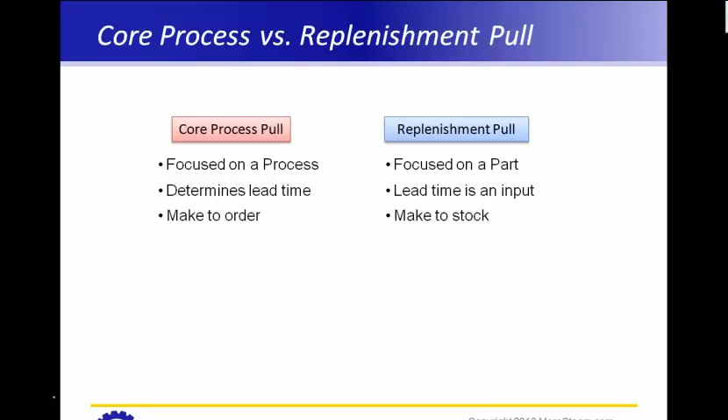So that's another difference. Like I said on the first slide there, core process pull is a make-to-order environment where we're not going to signal the process to begin working until we get an actual customer demand, versus a replenishment pull where we, based on historical information, size our replenishment pull buffers and then make that to stock. We still don't trigger the replenishment of that buffer until we get customer demand, but we do pre-populate that replenishment pull buffer with some stock in anticipation of customer demand.

Another difference, core process pull is truly applicable absolutely everywhere. Whether it be a shop floor manufacturing environment or a transactional or service environment, core process pull and containing and capturing the amount of work in process that we're going to allow into a process is really applicable absolutely everywhere. Replenishment pull on a large scale is typically more of a manufacturing type of environment.

There are certainly applications for replenishment pull in, of course, warehousing and stocking, and even in the service environments, supplies and whatnot can be managed on a replenishment pull or an easier to implement variation of it, a two-bin replenishment pull. But the large scale implementations are more in a manufacturing environment.

Now, as far as how we can actually implement these two different pull systems in terms of the actual control mechanisms, that's actually the same between the two. We can have physical kanban cards, we can have electronic signals, we can have bins, we can have any type of storage boxes or whatever moving in either one of these types of pull systems. So they're very common in that sense. So let's deep dive a little bit into the design of a core process pull system.

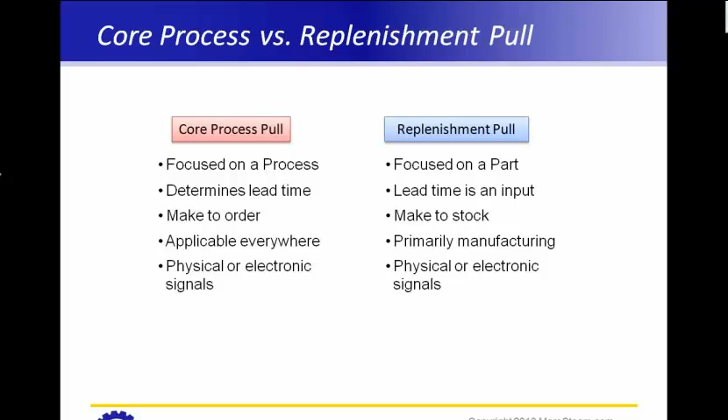Bringing Little's Law back to the picture, and hopefully we're all quite familiar with Little's Law. Total lead time through a process is equal to the work in process divided by the throughput, or the exit rate of that process. And so that's a pretty basic relationship that we should hopefully all be fairly familiar with.

Now, total lead time, in this sense, encompasses all aspects of that process, both value-added time and waste time. So we have the true on-tool or value-added time that's being performed on the work that's moving through that process. But we also have all the queuing time, the transportation time, rework time, all of that comes together in total lead time.

Now, the question can become, is total lead time something that is explicitly set by your company or organization? Is it something that the customer sets for you and they have a particular demand that must be met? Or, like many organizations, is it something that just sort of happens? And over time, we develop into habits of lead time through a process is, say, 3 weeks, and it kind of is what it is, and sometimes it's 2 weeks, and sometimes it's 5 weeks, but it's not something that's explicitly controlled, but rather something that just is experienced by the organization.

So in a lean transformation and in the Lean Six Sigma world, we want to certainly make that something that's not just observed and experienced, but something that's designed so that we have a specific lead time that we are going to target and hit, and we have the tools to make that happen.

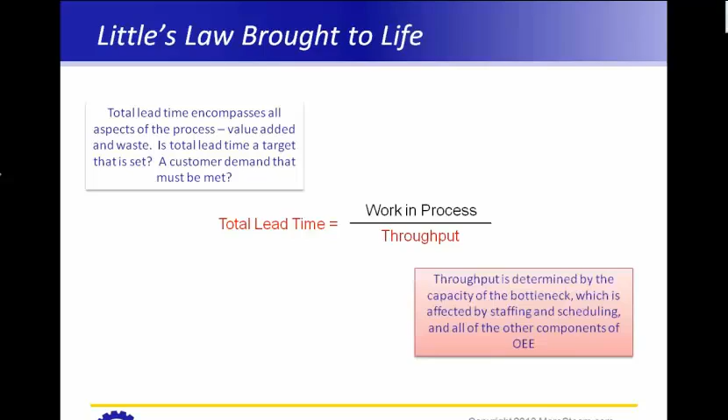If we look at throughput, throughput is determined by the capacity of our bottleneck step in the process, and all of the components of overall equipment effectiveness go into what might be our throughput.

If we look at the work in process, WIP is rarely managed directly. Over and over again, going into different client facilities, I'll hear the phrase that we can't finish something if we don't start it. And so WIP is pushed into a system and started without any regard as to what impact that is going to have on all the other parts or items that are already in process and what impact that has on the lead time of the process.

So in a core process pull system, we are going to be explicitly managing that work in process and sizing that work in process in relationship to our capacity and our demand so that we can hit a specific target total lead time. So in the end, we are going to be controlling WIP, and we can control WIP in several different ways with different mechanisms, but in the end we have to control that WIP and make sure that we then get a stable lead time through the process.

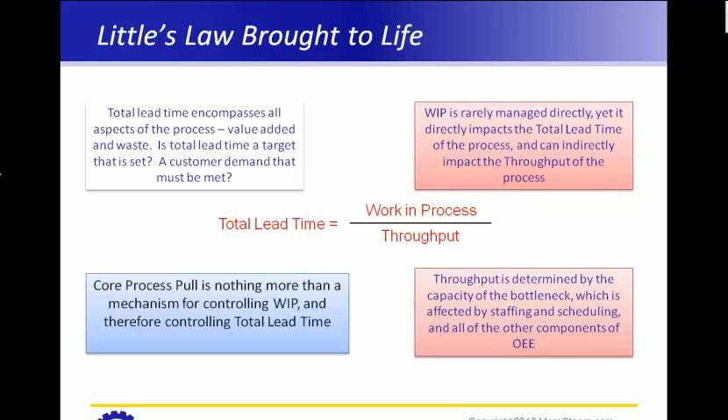If we were to calculate total lead time for a process and take the WIP all the way down to, say, one piece, even if one piece was really not enough work in process and we were starving our bottleneck, we still wouldn't have nearly zero lead time. We would run into a minimum, and that minimum is the value-added time that it takes to actually produce that item or produce that service.

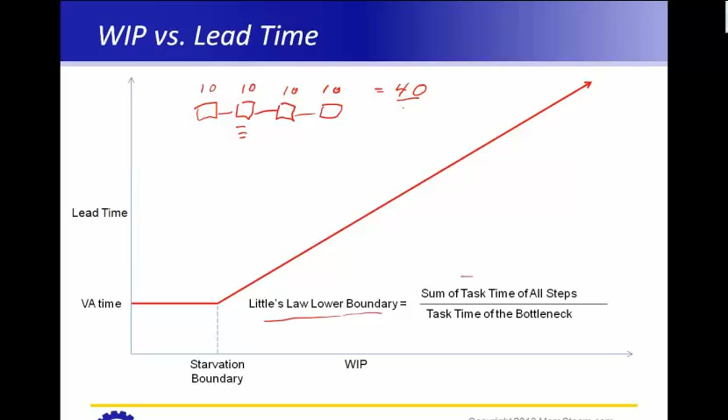And our bottleneck is any one of those, since it's a perfectly balanced process, so divided by 10, 4 pieces of WIP. 40 divided by 10. And that makes perfect sense. 4 steps, each one equally balanced. Therefore, we need 4 pieces of WIP so that everybody's working on something at once.

Let's take a look at another scenario. Say we have a situation where we have 1 minute in the first step and 1 minute in the second step and 37 minutes worth of work in the third step, and then 1 minute worth of work in the last step here. I think we were talking minutes above.

So we still have the same sum of 40 across all of those, but now our bottleneck is actually 37, which if we do that division comes out to 1 point plus a little bit, 1.03 or 06 or so. So in this case, we're actually saying that we really don't need 4 pieces of WIP. We need just a little bit over 1 piece of WIP in the process. Well, that makes a lot of sense actually when you look at what's going on in here.

If we had our 1 piece of WIP here at our bottleneck and they were just beginning work, we'd have the first minute of work, the second minute of work, the third minute of work, on up until we got to the 35th minute of work. And only at that 35th minute of work, when we're going to the 36th minute of work in our third station, that's when we need this minute of work here on our first station.

Then we go to the 37th minute of work, and then this piece can move from here to the second station and do its 1 minute there. And then the third station finishes its work. That goes to the fourth station, and then this piece begins its work there. So in a very unbalanced process, we actually need less WIP.

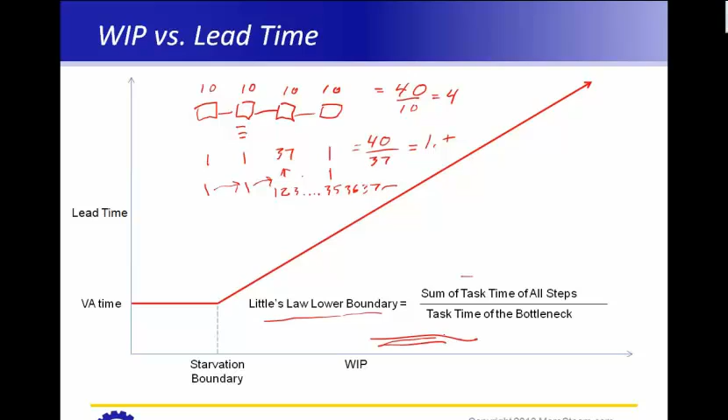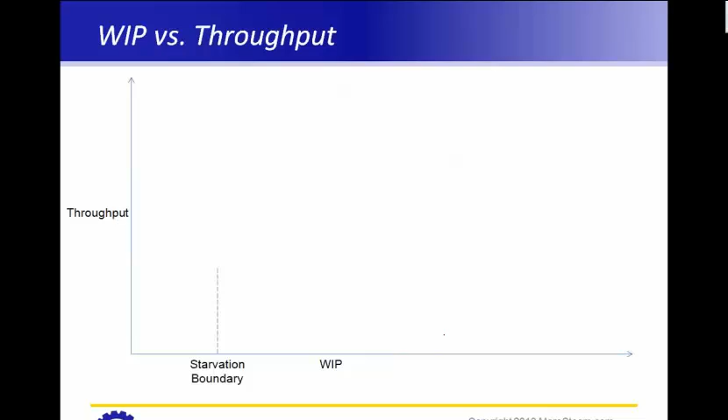When our bottleneck is a very dominant bottleneck in terms of task time, we need less WIP than we would in a balanced process. And so this calculation down here at the bottom of the screen gives us that lower limit on where our WIP can be, that starvation boundary. Now what about WIP versus throughput through the process? So if we look at this relationship, we have our starvation boundary here that we've carried over from the previous page.

When we get to the point where we are right about to starve our bottleneck, but not yet starving it, we will be at the maximum capacity of the process, right? Our bottleneck will be working continuously. We won't be starving it. Any amount of WIP below that starvation boundary, and we'll actually starve the process. And so we will see this point here where we are operating our bottleneck at full efficiency and there's no lost time. Any WIP level below that will yield a decrease in the throughput or the output of our process because we're beginning to starve that bottleneck.

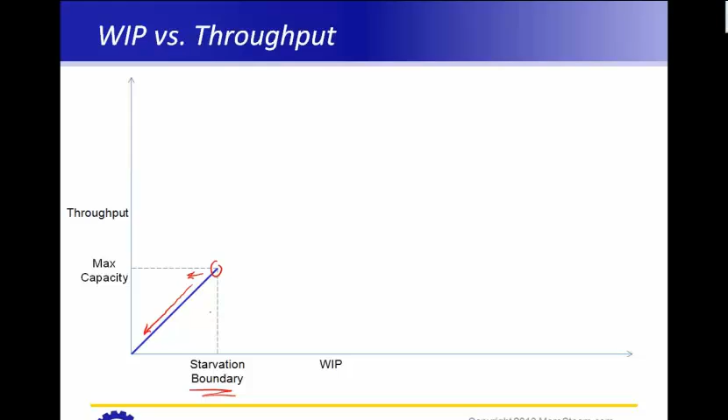And so we see that type of a curve. And as our WIP goes down to 0, our throughput will go down to 0 as well. No WIP in the process, therefore no output in the process. Now, adding WIP above this point does not improve our throughput at all. We're up at capacity, our bottleneck is working, and so we remain flat from there on out. So any of that additional work in process that we put into the system doesn't buy us anything in terms of output. It only delays our total lead time by adding queuing time to our process.

Now, a little bit of a nuance here. As we get more and more WIP, and we get way out here to the end where we've got lots of work in process, and this could be parts on a manufacturing floor, this could be emails in an inbox, or this could be loan applications or mortgage applications that we're trying to process. As we get more and more WIP, we tend to start having issues of having to switch between those different tasks, trying to keep up on everything, and doing a lot of switching, or on the shop floor, searching around trying to find the next part to work on.

And so what we actually see is as WIP becomes excessive, we actually start to see a degradation in our throughput because we start wasting our operators' times looking for whatever they're supposed to work on next. We actually have another boundary here. We have the starvation boundary on the left, and then we have an excess boundary on the right, where if we cross that excess boundary, then we actually start to experience this destruction of our capacity and our throughput capability.

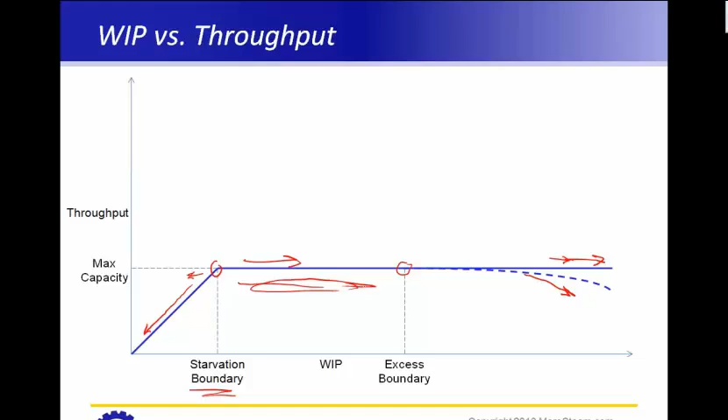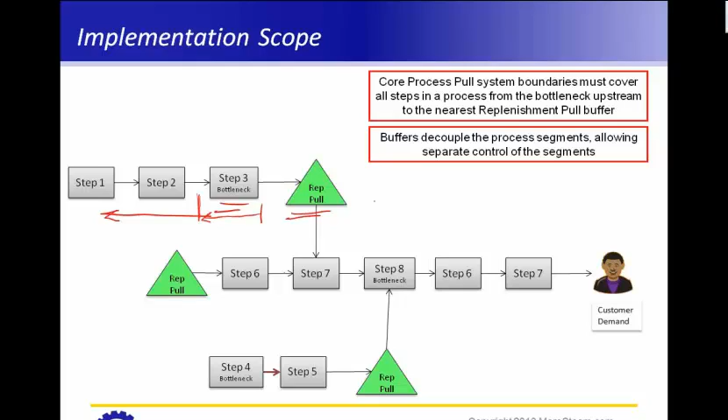So the first thing we can see in this process that I have on the screen is we have some replenishment pull buffers stationed in this process, and these replenishment pull buffers decouple this top portion of the process and this bottom portion of the process from the main process here. So that allows us to manage each of those pieces of the process separately. And then we see our bottlenecks, and then we see our upstream stations above those bottlenecks. In blue now are all of the stations that we need to control in our core process pull.

And we'll actually set up in this scenario 3 different core process pull systems. Core process pull number 1 will manage this top process. Core process pull number 2 will manage this main process that actually makes to order for the customer. And we could certainly extend this scope all the way to the end station here if we wanted to, and include this last 2 steps here, 6 and 7 in gray.

We could include those 2 steps. They typically won't have a lot of WIP in them because they're running faster than the bottleneck. So at times it may be most convenient to count the amount of WIP going in at the beginning here and count the amount of WIP going out at the end. That may be the most convenient way for managing the system. If so, we would include all those steps. Minimally, though, we do have to include this span from the bottleneck backward.

Down in this last process, core process pull number 3, our bottleneck is actually the first step in the process, so that's really the only one that we need to gate and control the amount of work in process. Now, we might use different mechanisms. We might actually have, say, bins that are moving here in this first process, and an empty bin would be a signal to start a new batch or something through that process.

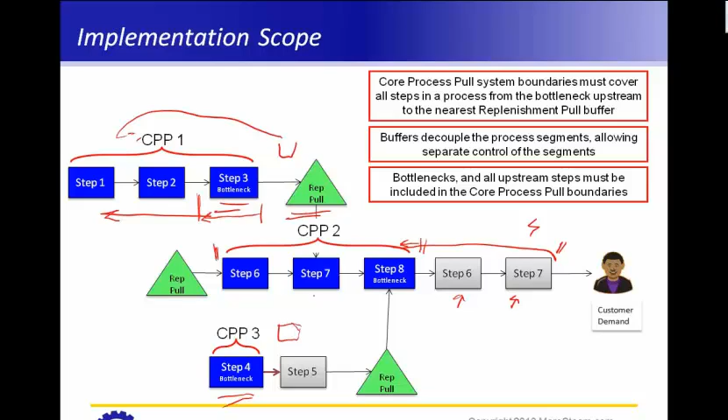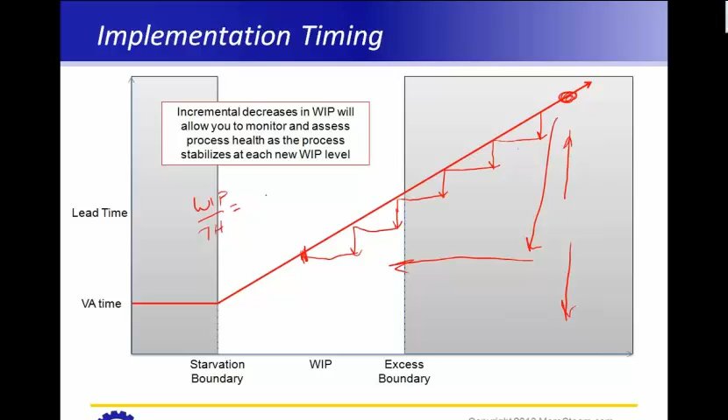As we're draining down this work in process, one of the things that we'll often see with Little's law, if we count up all the work in process that we have in a system, and we look at the throughput that we had out of that system, we might get a Little's law result that seems to be higher than what we're actually observing in terms of units coming out of the process. So if we're observing total lead times through the process of, say, 5 days, but Little's law says it should be something more like 8 days, that is a sign to us that we probably have some WIP that is not moving.

So for some reason, something is not moving in the process. It may be that it's some dead inventory that is still on the books and still stuck somewhere in the process, but isn't ever going to be used. And so we counted it when we did our Little's law calculation, but it's actually not moving, and therefore it's not in the way of the other WIP that's truly moving through the process, and so we get an observed process lead time that's shorter than the target total lead time that Little's law said we should have had. So you do need to look out for WIP that doesn't move in the process. Some sort of obsolescence, spare parts that are going to be very slow moving, something like that.

And then you come up with some timing to work your way down, and how long it takes you to work your way down and how many steps you need to take really varies from implementation to implementation. I would say at the very minimum, you would never have fewer than 5 steps in your transition down.

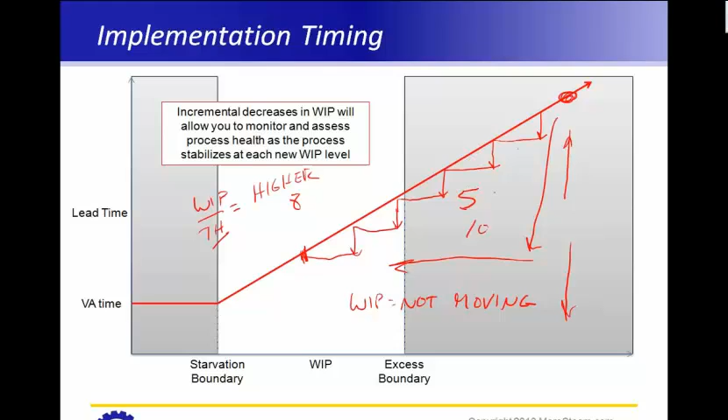All right. So a little bit of a summary about what we've talked about today, and then I have a simulation that I'll show you. Core process pull. It's a simple system to gain control over a process, stabilizing this total lead time. Now, core process pull is something that you can really implement virtually immediately in any process, whether it be manufacturing or transactional. Implement it right away, and by doing that implementation, we start to stabilize our process immediately.

At MoreSteam, we talk about the idea of containment. So a core process pull system is something that can quickly contain the damage that we're doing to our customers by stabilizing the lead time. It may be a grossly inefficient process that takes far too many resources and has far too much rework and all the other 7 forms of waste. So it may be a very inefficient process, but by at least containing that moving total time and containing that variation, we begin to stabilize the process and at least not transmit that inefficiency to our customers.

So it's a simple system to gain control. It's very well suited to transactional and manufacturing environments. It's a great tool in transactional worlds where we really haven't thought of things in terms of work in process. And therefore, work in process has been allowed to fluctuate wildly with big highs and big lows.

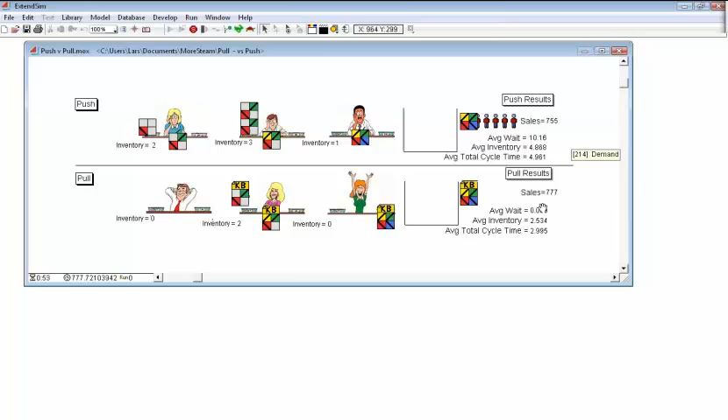What we have now is a whole line of customers queued up behind our push system here, waiting for inventory, waiting for finished goods. We don't have anybody queued up on our pull system. Our average inventory of our pull system is still at 2.5 because, again, it can never go above 3 because we only have 3 kanban cards. Average inventory in our push system is higher, yet still we have an average wait of 10 here, average wait of 0.009.

Now, this process is actually sized at about 95% utilization. So that's a fairly high utilization rate. And in a high utilization system like that, any lack of work at the bottleneck is going to cause a process to lose that capacity and have a tough time ever catching up with that again. And in a push system, we have no mechanism for really managing that WIP and keeping it in the right place.

As processes get lower and lower utilization, so if we're down in the 50 or 60% utilization range, the impact is less severe. But certainly in the transactional world, we're tending to look at processes that are designed to be very highly utilized. And in the manufacturing world, we're shooting for higher and higher productivity as well, and therefore higher and higher utilization. And it becomes more and more difficult to carefully manage the WIP, how that WIP moves, and when work is authorized.

Ideally, we will have a system where the lead time that it takes to get through our process steps, however many process steps that may be, our normal lead time for any product or service, is short enough to meet customer expectations of that total lead time, even if those expectations change.

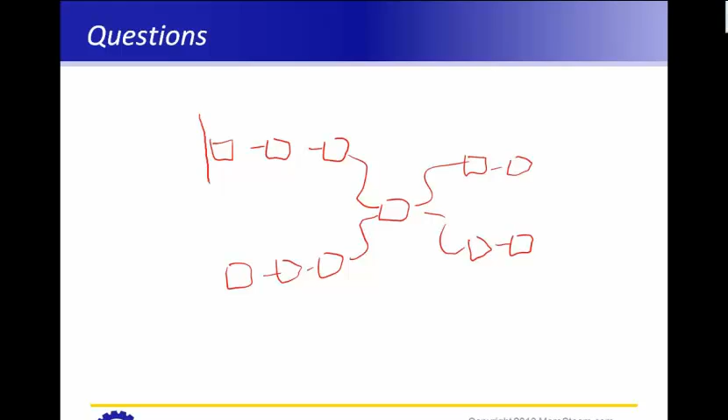So in this type of a scenario, we really need to start now thinking about the amount of WIP and the core process pull sizing. Two different ways we can approach this. One is we put a system that bounds this entire process. And so we go from beginning to end, right? And our core process pull system and our cap on the amount of work in process allowed in that system is going to span the entire process. And our queue for what we get to start next will be a prioritized queue that will feed either to that process or this process only when we have an exit either here or here. And we have a completion, and that completion authorizes a start.

So that's one scenario where we actually put a work control system over the entire process, and that's a pretty common implementation like this. I've done this type of implementation in heavy manufacturing where we have lots of welding going on multiple different lines, but then we come to a common machining center, and that common machining center is the bottleneck. And so we cap the entire building and just then manage this prioritized queue based on due date. And if we have identical due dates, then we start looking at nuances of customer and perhaps profitability and things like that. So that's one option.

Another option is that we can simply put the work control right here and put our core process pull system just over that system there, so that we are really gating that process and we have our prioritized buffers here, and then we put a second work system, a core process pull over each of these sections here, so that we limit the amount of WIP that can build here, we limit the amount of WIP that can build here, and then we limit the amount of WIP that can be in queue and going into this bottleneck process here.

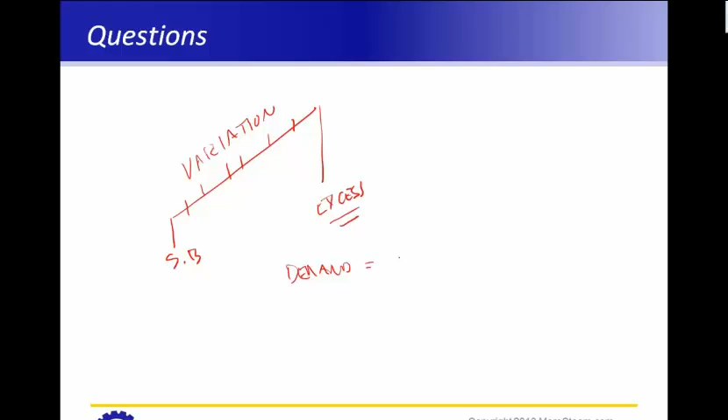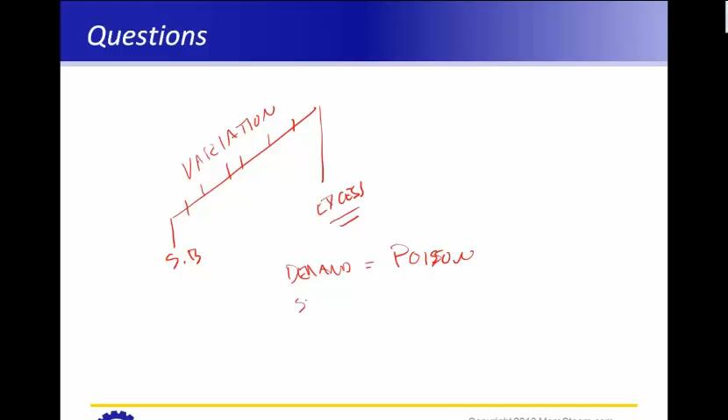So how to figure out where to be in this range, that is something that is difficult in some cases and impossible in most to specifically mathematically calculate. The reason being is in almost every process we do have variation. So for some degrees of variation, processes where we have relatively well-behaved demand variation, and by well-behaved, I'm not talking about normal, I'm talking about demand variation that is perhaps Poisson, and then service variation, so the time it takes us to do our service, if we use an exponential distribution for that.

When we have very well-behaved mathematical distributions and our reality actually matches those distributions well, then the math is tractable enough that we can calculate the queuing effects. And when we calculate those queuing effects, then we could get a pretty close answer mathematically of how much WIP we think we need to have in the process based on the queues that we expect to build, based on well-behaved demand and service.

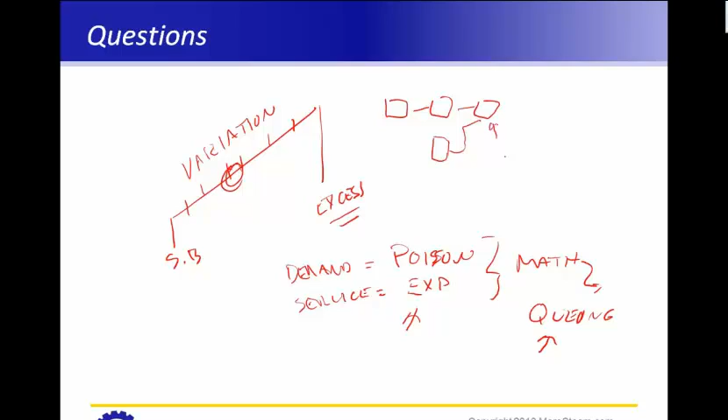Unfortunately, that queuing theory works well for relatively straightforward systems with well-behaved distributions. It starts to fall apart when we have systems like this, where we have multiple streams coming together, and perhaps where we have not well-behaved processes. So perhaps we have a service process that we modeled as, say, a log normal. But in fact, no process is going to operate as a log normal because we have some minimum here, value-added time; it will never take below value-added time for our service, right?

So it's already truncated on the left side, and chances are it's truncated on the right side also, because if something starts to take too long, management is going to intervene and we're going to change the process. The rules are going to change. So we almost always end up with some sort of modified distributions representing both our demand and our service.

The places where we see mathematical distributions really operating true to themselves are very, very high count transaction environments. So stock market trading and things like that, where we're talking about millions of events happening per minute or per second, then things start to look like real mathematical distributions. But in most of our human world, things aren't moving that quickly, and we're going to end up with distributions that aren't so well behaved.

We're going to end up with discontinuities where we get to a particular point, and then we move to a different point, and then to a different point. And these discontinuities will just throw the mathematical calculations into a tizzy, and it makes it very difficult to actually come up with accurate numbers. There is some information out there that can help us out, and there's a fairly large body of mathematical work on queuing theory that can come in handy.